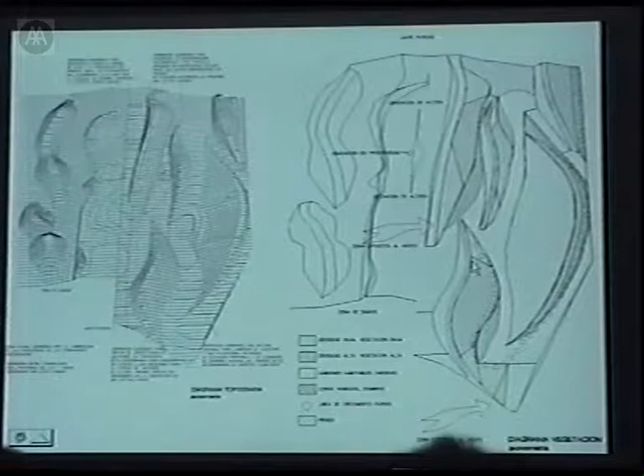At the same time, because the city wanted to have a park with some kind of vegetation, the dunes will form a topography that will protect certain areas of the park from the sea breeze. This is the kind of topography that we envision.

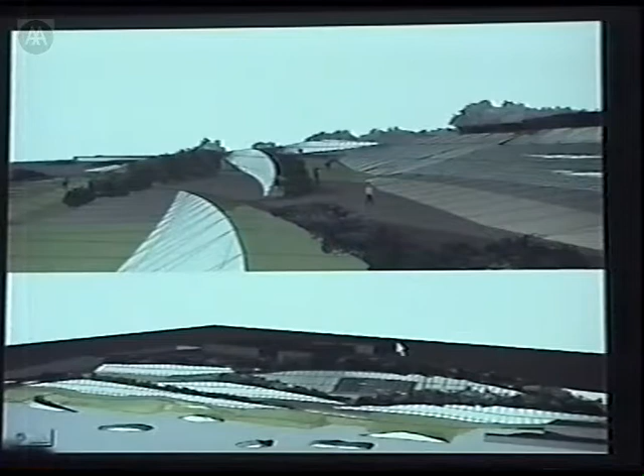There was also another program given by the client at the beginning, which was that we had to locate certain open-air auditoriums in the park, and that was also used as a criteria to generate the geometry of these dunes that construct the edge of the city.

Now, the client didn't have a very clear program at the onset of the project, and there was an extended phase of discussion about what the program could be. Originally, they told us they wanted a very large auditorium. We soon realized that it didn't fit.

But somehow that idea of a green park started to drift towards a more hard surface that has that topography, has also some plantation, and a hard surface that can be used for performances or public events that cannot be located in the center of the city.

So one of the programs we started investigating to generate the topography was extreme sports. The park will become some kind of surface where the relationship between the physical self and the landscape is tested in different degrees. We did categorizations of these extreme sports topographies and also auditoriums, the programs we were considering.

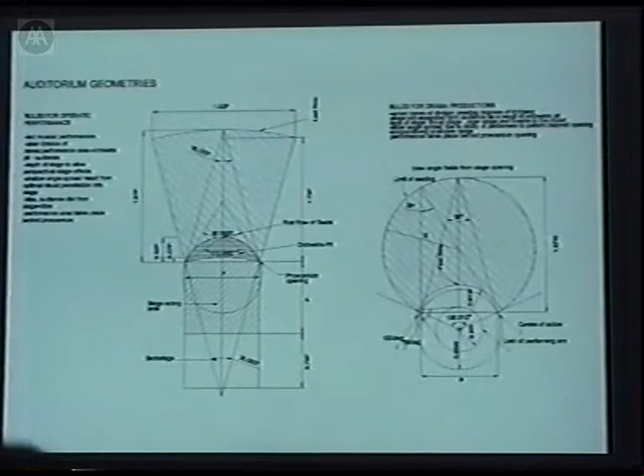We also did a lot of sampling of performance spaces, projection screens, etc., trying to identify the geometry, because the more we evolved the project, the more we realized what was interesting about this park was that it had an ambiguous condition between what we understand as a traditional park, a place where you sit, a topography that isn't particularly specific about its function, and a series of performance spaces.

So when there are performances, these topographies work as auditoriums, as a sequence of auditoriums. When there is no performance, when there are no events, they become a park.

So there was a process in which we consulted different festivals in the city. We started considering the orientation of the auditoriums and the access to them, because some of the auditoriums had quite a large capacity, 10,000 people, 8,000 people.

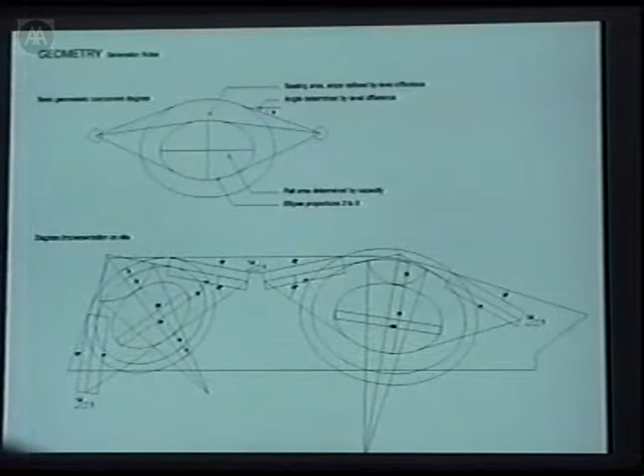Finally, out of all this sampling of open-air performance topographies, we came up with this ellipse that has a proportion allowing us to orient performances in different directions—for example, to throw the sound toward the city when it won't be harmful to the neighbors, but also to be able to reverse the orientation.

We made this prototype of that performance space and the series of ramps that mediate the topographies of the site. We devised this system that, in a way, is a prototype—it could be extended ad infinitum, and it's able to produce different scales of performances, adjusting to the periphery of the site.

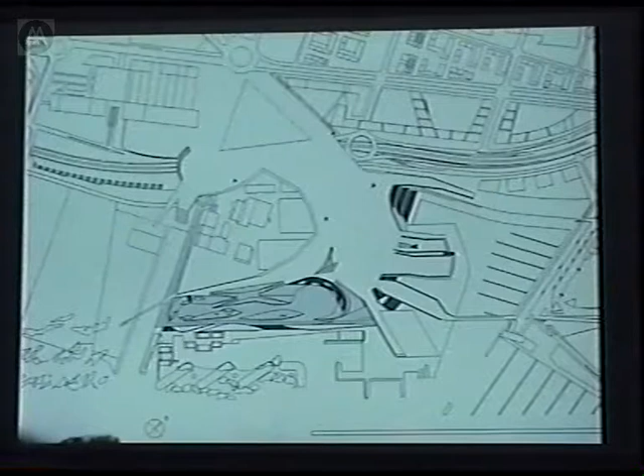That is basically the first topography that is created. You can see roughly what is happening with the other projects. This is an esplanade designed by Elias Torres covering the water purifying plant. We are bordering there, and this one is done by Beth Gali, this by Jacques Herzog, this by José Luis Mateo, and so on. There is a very important series of buildings now being planned and, in some cases, already being built. These are some of the images we made originally to approximate what the park will look like.

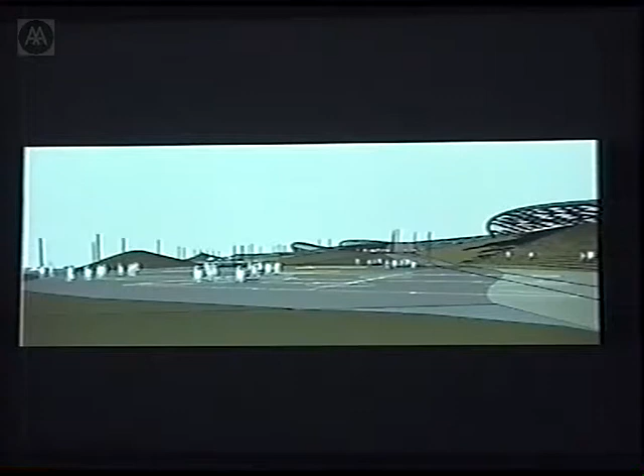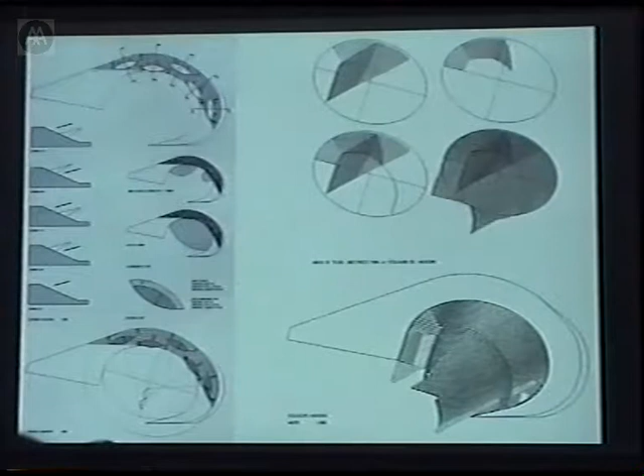Was the problem we identified as the problem that will generate the project on that smaller scale.

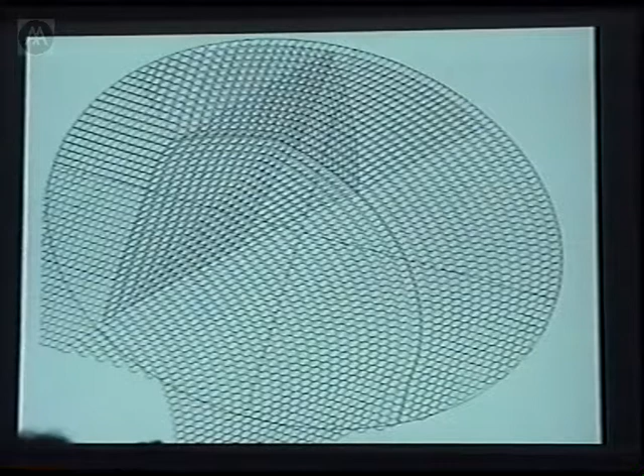Since we had to have hard surfaces and greenery, green ground and hard paving, we started thinking how the tile can also have spaces left for the grass to grow in between, and how the borders of the tiling will automatically generate these differentiating patterns of tiling.

This is what happens when you start sliding a certain type of tile around each other. We did several studies of tiling.

We actually liked this idea of tiling very much working in Barcelona, because, as you know, Barcelona has a great tradition of tilers. Jujol and Gaudí used to work also with irregular tiling in irregular surfaces. The difference here was that we were trying to accommodate the contingency of the topography with a regular tile, with a regular system.

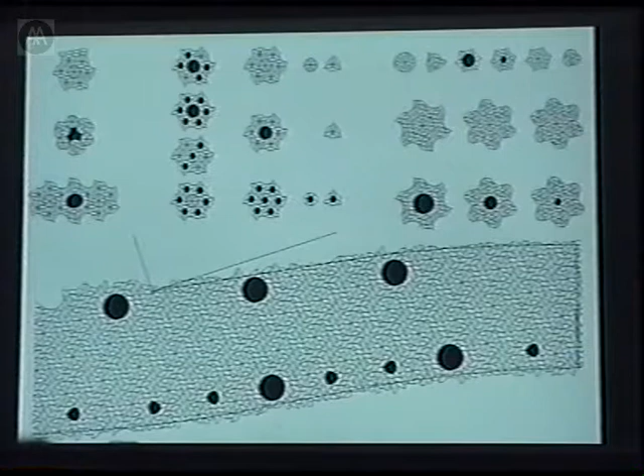These are just more examples, because obviously also the trees had to be planted in the tiled areas, and we were trying different non-directional tiling systems that would allow us also to open the places for the trees.

And finally, we settled for this system that is based on a conveyor belt, like an airport conveyor belt, which is basically a system of tiles that follows a line and adjusts to a certain perimeter and can fill the plane by following this parallel line.

We had to make a program in order to place these tiles, because we had something like 150,000 tiles. Here you see what the program does, which is to adjust the tiling pattern to the conditions of two borders, and then proliferate the tiling almost as a knit through the whole surface of the park.

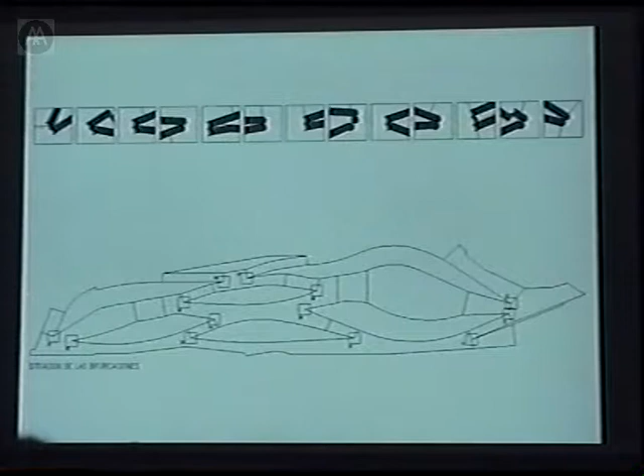We liked also the fact that the tiling system was linear, was consistent with this linearity along the coastline that the structure of the dunes had, and so it was also bifurcating in certain locations. You can see how this conveyor belt pattern is actually able to do this, and these are some of the details of these bifurcations of the ground.

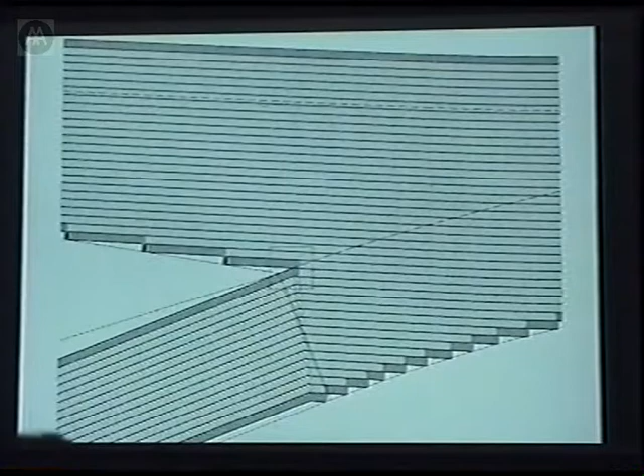It's just about our obsession with tiling. So this is also what happens with the topography of the park.

The park, as I was saying, has dunes and has planted surfaces, and in some areas the dunes are also inhabited. And what we did with the system, the ground retaining systems of the dunes, was to also use another variation, let's say, of the same tiling system.

Which it was something that, if you translate it from the Spanish, sounds like reinforced earth. Which is a system in which the tiles are connected to a bar of steel that goes inside the dune, and as the earth is compacted, it makes the structure self supportive.

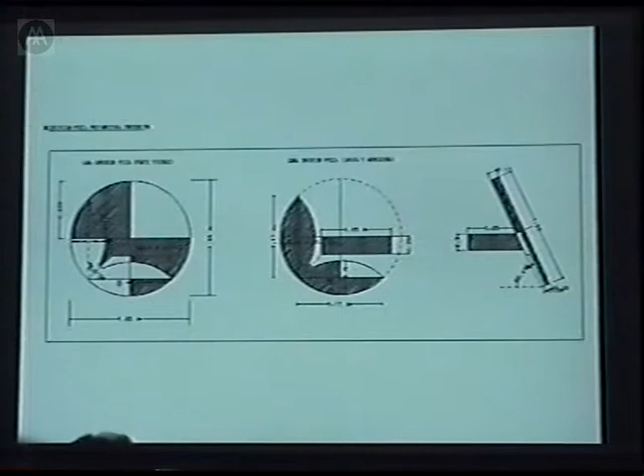So this was the piece of the tile, which is much bigger than the one in the floor, for these retaining walls. And these are some of the effects that this round tile that also adjusts to an irregular geometry produces.

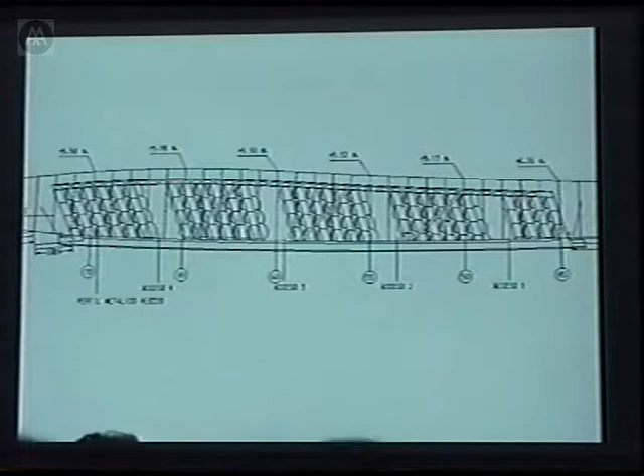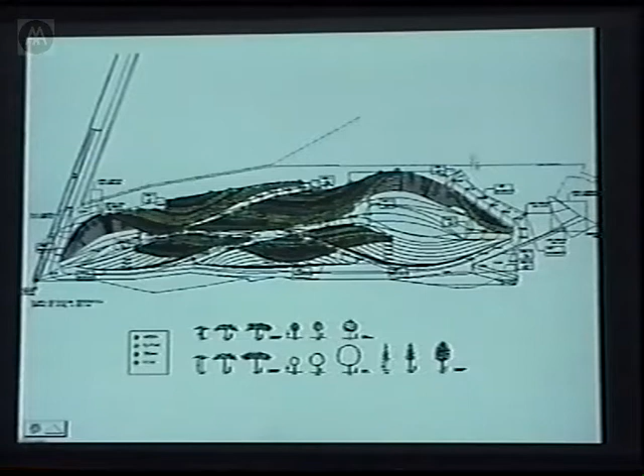And also you can see here the under dunes with some complementary facilities, connection to a car park that is at the back of the park, a kind of disco that is also part of our project, there is some kind of depth around the park.

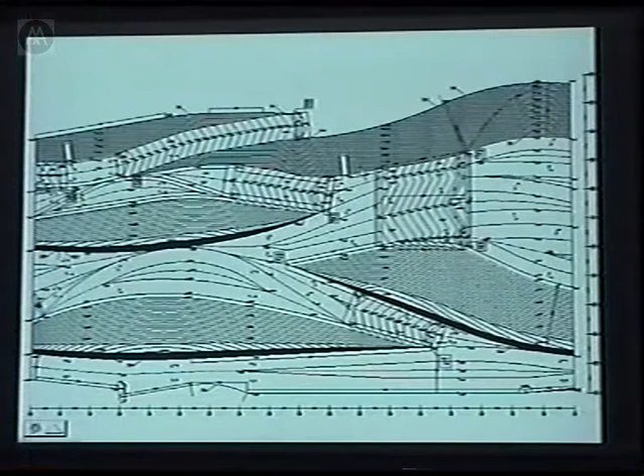This is the final geometry that the setting up of the drainage sectors of the park, that we also make them consistent with this kind of dunar geometry. Sections, I think that maybe it's not so necessary to explain much more.

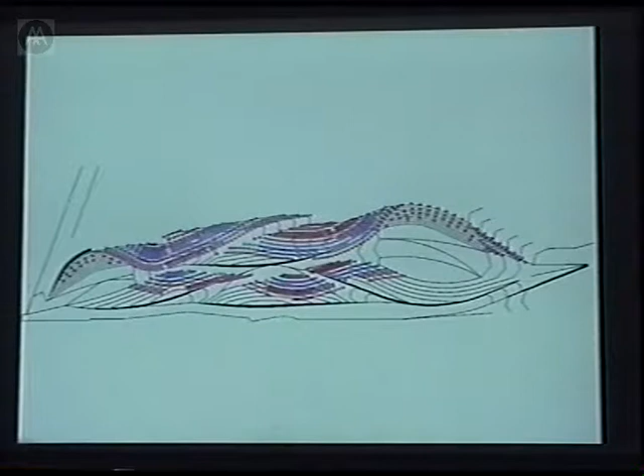This is what I was explaining before about the way of the grid of planting trees inside this hard, what sometimes is hard, sometimes is green surface. But they are planted in such a way that you can go perpendicular to the dunes in order to cut the green with a machine.

So there is also a whole series of knowledge about how the maintenance of the park will take place that generates these grids and the densities of the trees on top of the dunes. And finally, hopefully will look more or less like a park.

Second project is a smaller project, for the police headquarters in a little village in the south of Spain called Villajoyosa, a village of about 25,000 people that is now becoming a hot property of the real estate in the area south of Benidorm, and is improving the public facilities of the town.

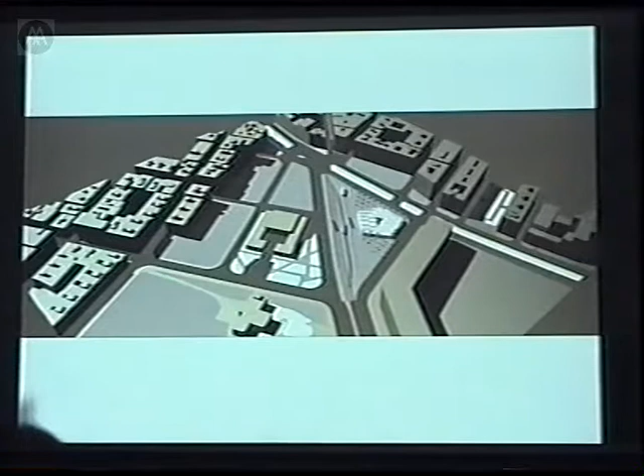The site is that triangular piece you can see here. It's actually not only the municipal headquarters, it's also the reorganization of the railroad platforms that run along the coastline. It's quite an interesting place: here we have the main access into town from the highway, the center of town is somewhere here, and here's the line of the tram that goes between Benidorm and Alicante, stopping in all the coast villages.

Our approach was to try to make a very low building, almost a building that is part of the ground, a closed fence, studying the geometry of the site. We also had this idea that because it's a police building, it had to be kind of secret, so it had to be enclosed, minimizing the ratio between perimeter and area - as close as possible to a round thing.

So what we did was offset the lines of the perimeter, then chopped these two edges to keep the area the building required within that compact form, and we obtained this pentagon. This was critical, because everybody in town thought it was great to have a pentagon.

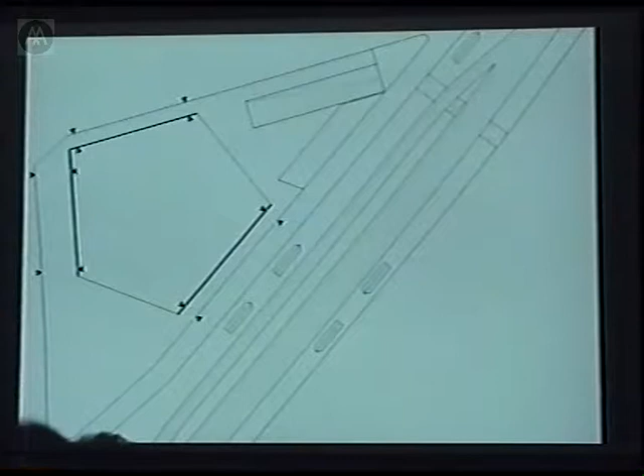It became already a famous building before it was built, and now even more famous after September 11th. This is the Pentagon - we always looked at it as a kind of rock, a thing that is broken. It's not very clear what's happening inside, and this top surface or profile of the edge was...

generated by skylights. The building is secret, it's like a fence, and it's all lit from the top. It's organized in plan - we'll see it probably later - but the idea is that the building has this system of skylights that brings light into the different bays that compose the plan and construct the perimeter of the profile of the mass.

We structured the Pentagon in these three bays, or directions of bays, around a central courtyard, because below there is actually a prison that is lit by this courtyard. There is one floor below.

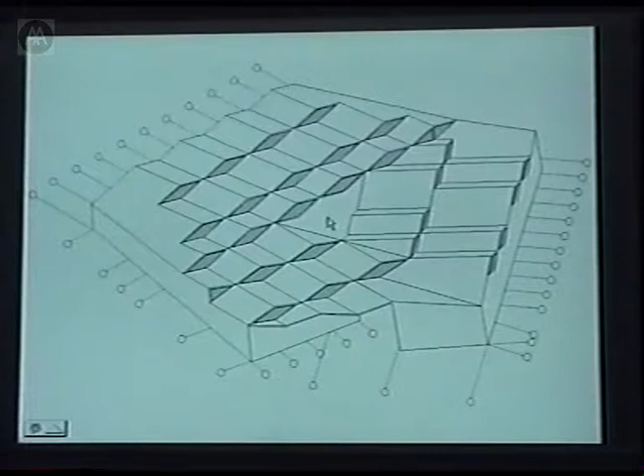What was complicated to do - and we had to do this by trial and error - was basically to start with that profile and keep extending it with a certain slope, negotiating it with the bays that are in a different direction. But sometimes the edges of the roof would go too high or too low, or you'd have head clearance problems. It was actually a very difficult problem.

As you can see, the walls inside are tilted. This is also very funny - I think the police boss couldn't really see it at the beginning, and only recently, when the project was approved, realized that, and was quite surprised. The section is 2 floors.

The top floor is where all the brigades operate, and the bottom floor there is a garage, a kind of small detention center with cells, and there is a shooting gallery for practicing.

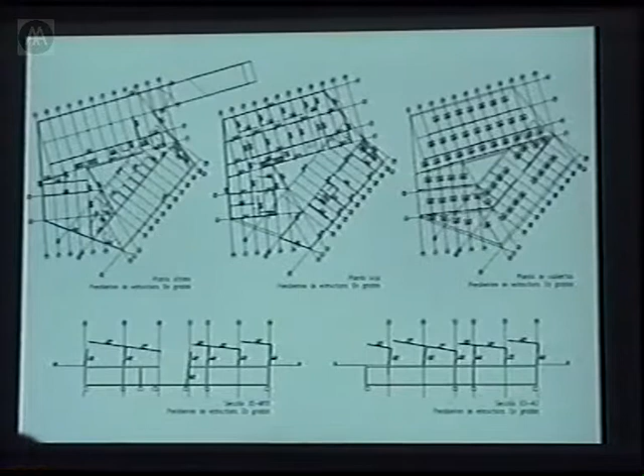So these are the sections of the offices. The grids maybe not, and this is basically how the building will feel from inside. We are doing this building all in raw concrete, but with a tinge, kind of earth tinge. The idea is that it becomes really like a piece of stone, of local stone. The other interesting thing is that normally these kind of skylights are very high, but in this case they are most of the times at 2 meters 10.

So you will have skylights, but at a very low height, which we think will be quite a special thing. I forgot to mention that these canopies are also part of the operation. These are the plans: the shooting gallery on this edge, the small prison with the cells looking onto the courtyard here, and the parking on that side. And this is the upper floor, where there is a bay of public facilities, a bay of administration, and a bay of brigades or offices, and some kind of public courtyard.

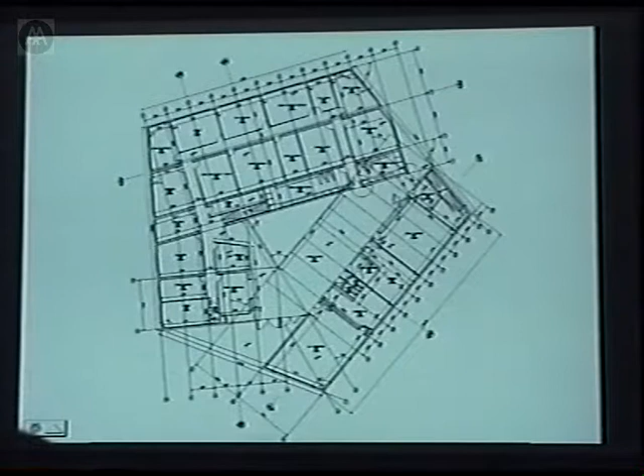The other interesting thing is that obviously we wanted it to be closed, but we thought we couldn't close it completely. So we started thinking, how can we provide windows to the offices on that first floor? And we came up with this pattern of bullet holes that form some kind of lattice in front of the real windows that are normal aluminium windows behind. Actually, they are not aluminium windows; they're steel windows, because they have to be quite tough.

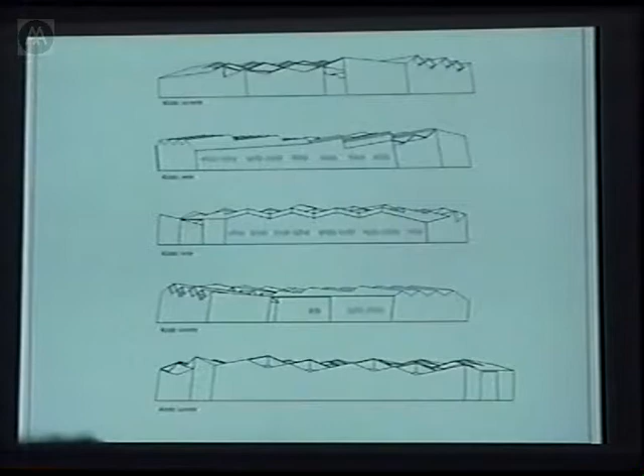And the last project, which is a commission that we won recently as a result of a competition also in the south of Spain, in another touristic village, the place is called Torrevieja. The project is the remodeling, the building of an auditorium theater that will be occupying the place where the traditional theater was, and the remodeling of this plaza that is in front of the theater.

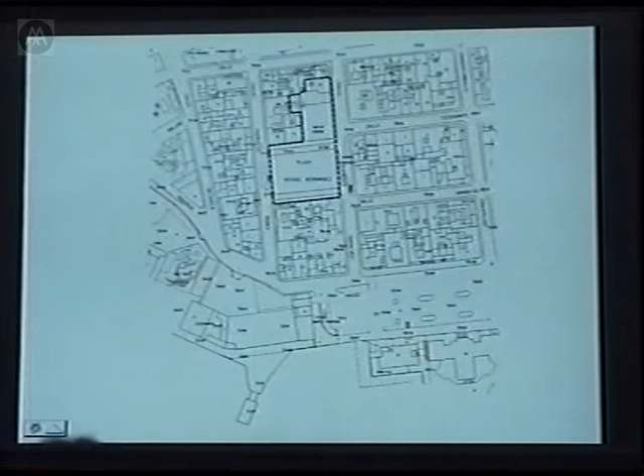So the site for the theater is here. This is the area that can be built as a corner of a block, and then we have to remodel the plaza in front. This is the waterfront, and this is really the center of the town. This is the site after the theater collapsed, and the plaza in front is incredibly ugly.

So basically, the first strategy we had a program that in this case was, as opposed to what happened in Barcelona or in Villajoyosa where the program was quite vague, here we have a very specific program. We had to have 650 seats, VIP room, blah, blah, blah.

So we realized quite soon that the site was actually small for the program we had, and that there was no way of doing things that were too extravagant, because in a way what the building was doing was to close the existing block.

So the first move we made was to say, well, we had a certain idea of how we wanted this theater to be. We want the theater to try to break the division, break the proscenium, make the seating area become eventually part of the stage. So what we did was to simply fit into the site the largest box that we could, where we would put the scene and the seating area together, and use these areas that were left between that box and the firewall as the complementary, the supporting facilities.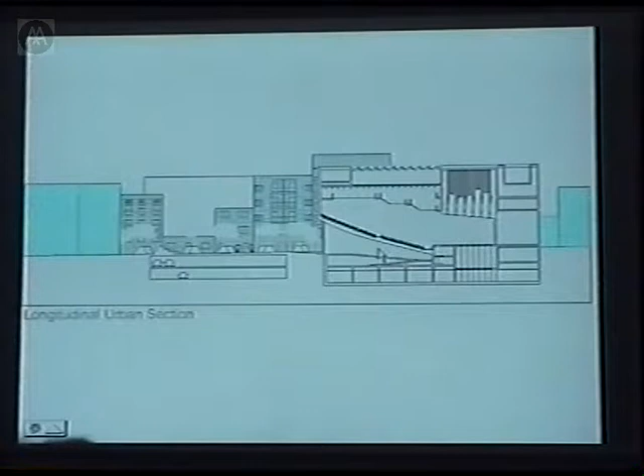So this edge had to be as close as possible to the ground level, but at the same time we needed to put inside of here the foyer. And since part of the project was also the remodeling of the plaza in front, we started to consider maybe the possibility that there is no border between the foyer and the plaza. So there is some kind of continuous space across them, and that the way to give the building a scale of a public building was, rather than making formal gestures, to simply fill out the maximum volume that was allowed by regulation.

So take the edge of the building to the limit and build as high as we can, and simply produce this cut in that mass of the building where the foyer or where the plaza will go into the foyer. So this was basically the idea that we proposed.

We think that what will be more interesting of the project is this big belly that is generated automatically by the geometry of the seats, cantilevering 25 meters in every direction. So we also made it very heavy. We cladded it in stone so that you will almost have the feeling that you are in the plaza and you go under a very, very large and heavy stone that is hovering over the public space.

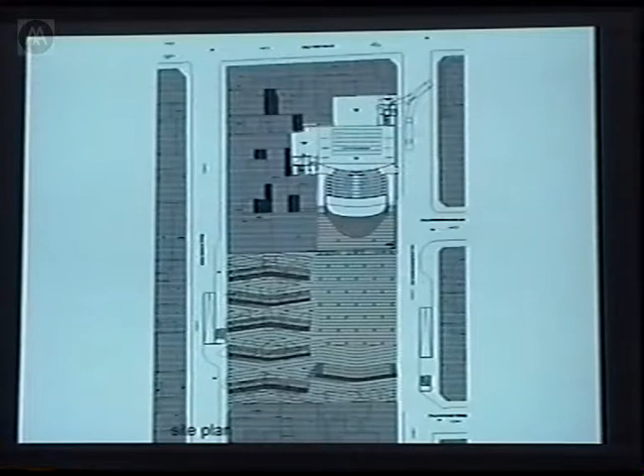This is also a certain treatment of the plaza with trees, etc., but we are not going to get into this. The idea was very simple: to make a theater that doesn't have almost any fat, and it was much more of a typological research than about the synthesis of new topography.

So basically we knew that we were very limited, and all we tried to do is say, well, what will happen if—normally when you look at plans of theaters, or when you go to theaters, you have this stuff around the room. In this case, because of the limitations of space, what we did was take the sitting area to the edge of the theater.

And then we did a lot of research in terms of how to make the ramps, how to make also the public ground—like all these are analysis of ramps in the foyer for handicaps, etc., and the areas that result for cafeterias and foyer.

And we did several of these tests, not only as ramps but also as a kind of auditorium under the auditorium. We quite like the idea that the ground of the plaza sinks down by the effect of the weight of that thing that is floating on top of it.

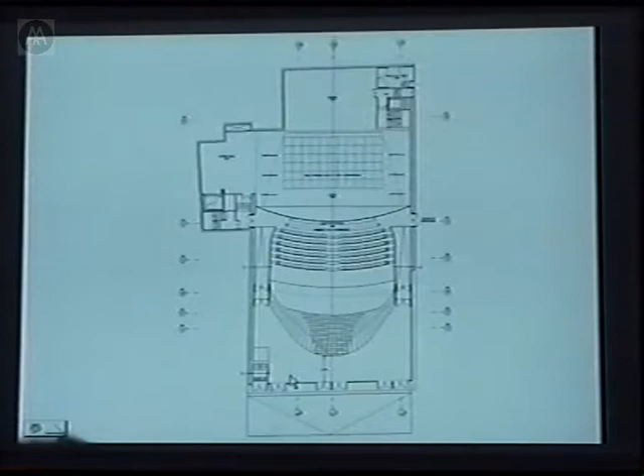So all this area is under the big cantilever. This is basically the effect of the foyer, and the ground level going down under the belly.

And obviously, as part of this typological research, there's the location of corridors, and also there was, because of the limitations of space, a lot of problems to keep the 650 seats and at the same time provide an orchestra of the right scale.

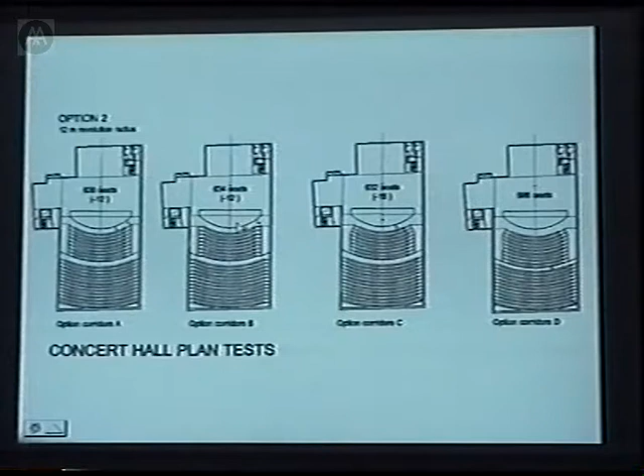So there was a kind of pressure between the orchestra and the seating area that these drawings give account of, until we finally fixed it in this geometry, where also what was interesting is that we had to enlarge the orchestra to touch the edges of the proscenium, which we thought was quite consistent, typologically speaking, with this idea of blurring the limit between stage and seating area.

Anyway, this is what the geometry of the acoustic ceiling will be like.

This town where we are building the project is famous for salt lakes, and these salt lakes have become some kind of the image of the town. So we sold to the mayor the fact that once you are inside the theater, you are like in a salt crystal. Now actually everything is white.

Now, I mean, this is from the competition stage, but we want the seats to be made out of white leather, and the ceiling to be made out of translucent plastic, almost as if when there are lights, everything is white, and then suddenly everything becomes black.

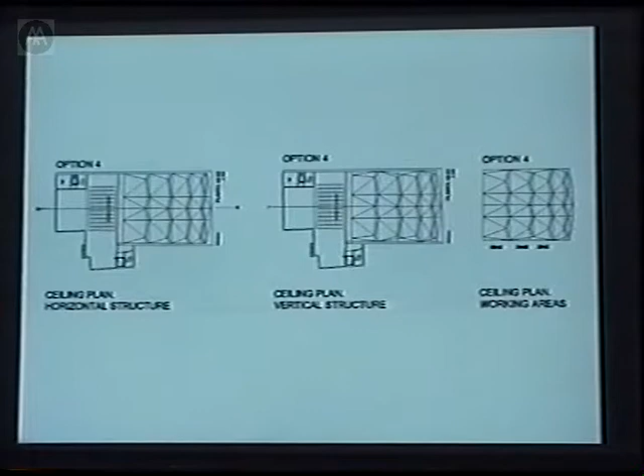So the geometry of this false ceiling has obviously also been a matter of research in which we have had to test different possibilities for the arrangement so that they actually work acoustically. We are working with acoustic consultants, and they do—we reshape the ceiling, and they tell us whether the noise is efficiently distributed in the room or not.

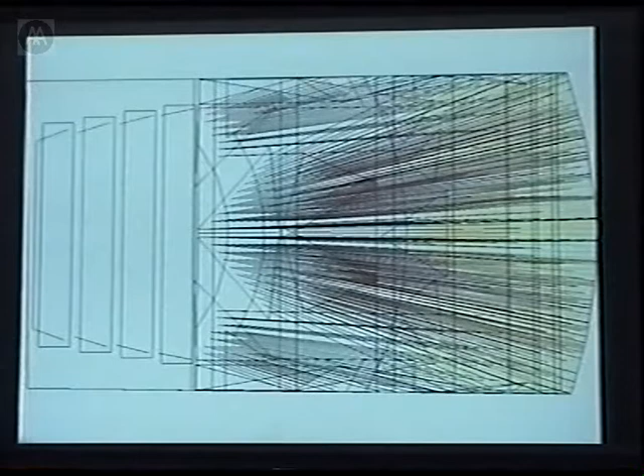So these studies, in a way, are what will finally fix the geometry of that salt crystal. This is the one we have now, and the way that the geometry of that ceiling has been evolving through different tests.

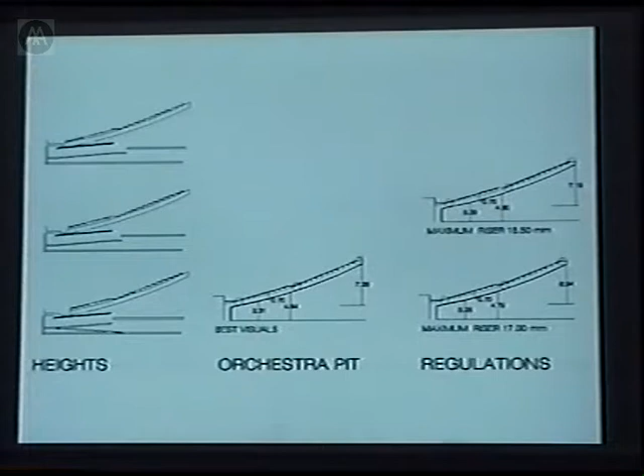The belly. This is simply to explain that the opportunity here was not so much about inventing something completely new, but on the contrary, to be incredibly specific to different parts of a conventional typology and play with them. These are different arrangements of the seating area with curvatures to answer to both fire escapes, and also the air conditioning, which is placed under the seats. It's a kind of plenum where the air comes from. So we had to introduce the structure, the air conditioning, the visual conditions, and we did hundreds of tests of this in order to fix this profile of the edge that will define the belly.

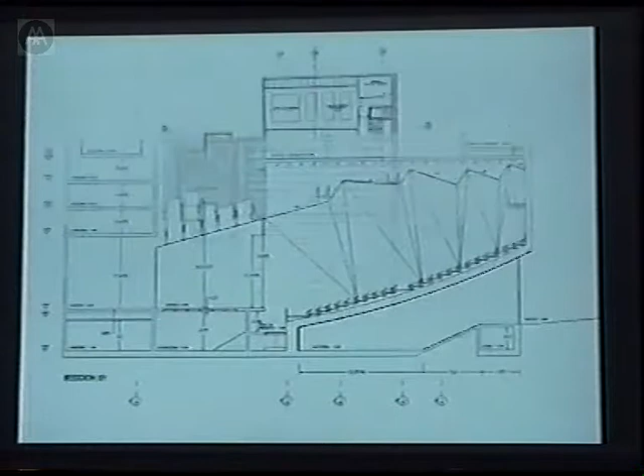And this is the section as it is now. You can see that also we have a function room on top that helps us use the space in order to make the volume of the building this big block of stone. That is this room. And I think now I'm going to let Farshid continue and make some noise.

Now you know that the production drawings are done by the Spanish in the office, given the spelling mistakes.

This is the second time round. Can you hear me? No? I hear myself too much. Okay, this is better. Can you hear me? No? No, I hear myself. Can you hear me now?

Just very quickly, because there is less time and this is a smaller project than Yokohama, we were invited by Toyo Ito as part of a master plan he organized for the city of Groningen, for an architectural festival that the city hosts every 2 or 3 years. This year the title was Blue Moon, and 4 offices were invited, each given 2 sites: one in the inner city, this being our site, and one in an area on the periphery called Europa Park. Our inner city site was to be a house, and our Europa Park project was initially to be a temporary station and a market, and eventually became a performance space and a market.

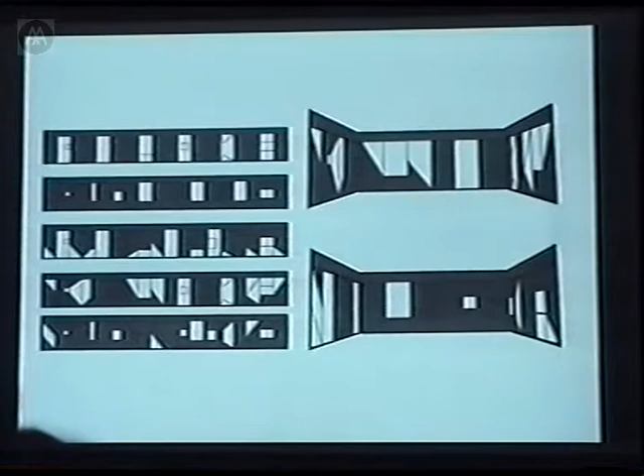It's interesting, talking about these 2 years, that we've been working in a number of countries, each bringing with them a whole different culture. We've found you have to be incredibly efficient in how you operate in each one, because they are very, very different. For example, in Holland the clients are incredibly open — they loved the idea of our sleeping bag and encouraged us to go quite far with it. And yet the construction costs in Japan, at the beginning, were incredibly low. So we...

Did I not say Holland? Sorry, in Holland. That's good.

Costs in Holland are incredibly low, and we had to face this and try to find a way to keep some of these earlier experiments or ideas in the project, yet move on. This is when the fabric became impossible due to costs and also some technical constraints.

We started working with a more metal fabric, a chain link, again working with ideas of mounting it on rails that would allow you to open it up in a less prescribed way than having windows on a facade, so it would actually be an interactive skin. We ended up having to use a ready-made system.

We chose a standard aluminum perforated steel paneling system which cladded the facade. We still kept the idea of a silo, a discreet volume almost closed to the outside, that allowed you to open the skin in a number of ways. These are some ways to open the inside, carrying out some of the earlier fascinations, but obviously not any longer in fabric.

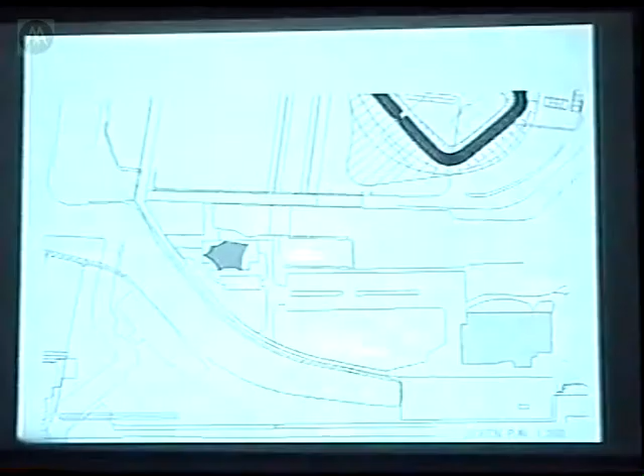The pavilion project became a tent since we chose to work with fabrics. We were given a site to begin with, then moved on top of a concrete plinth that we were told to work with as the foundation. We worked with Adams Kara Taylor on this project.

We proposed that the fabric would be imprinted with a camouflage pattern so that it would be like an artificial forest, with images of how it could be in a market situation. The geometry was defined looking at the various entrances and approaches we had to consider.

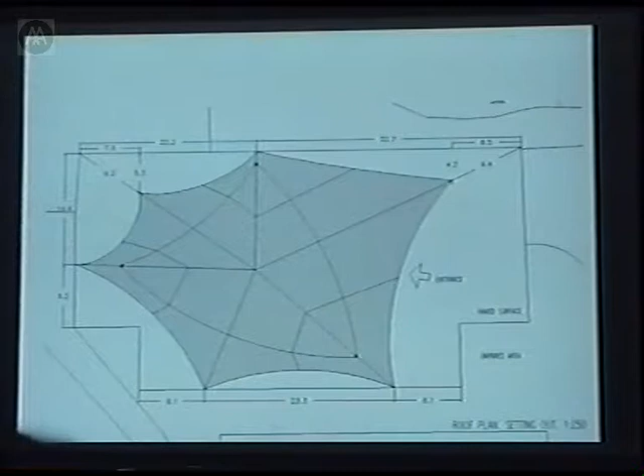We were later told that a round table would be brought in for the events and performance, and the position of the columns, etc., were all dictated by this table. This is the final geometry of the tent, with some other drawings of the final form.

We tried to lighten the columns by working with tensile options that, due to budget and time, were not possible. These are some images of the tent.

Again, the camouflage scale - I'm not making an excuse, just explaining that it is very different to what I'll show you later in Japan - the time was so short that this process of integration of information we are so obsessed with becomes incredibly short and narrow, and you have to learn to be efficient in other ways.

Some of the other images of the tent.

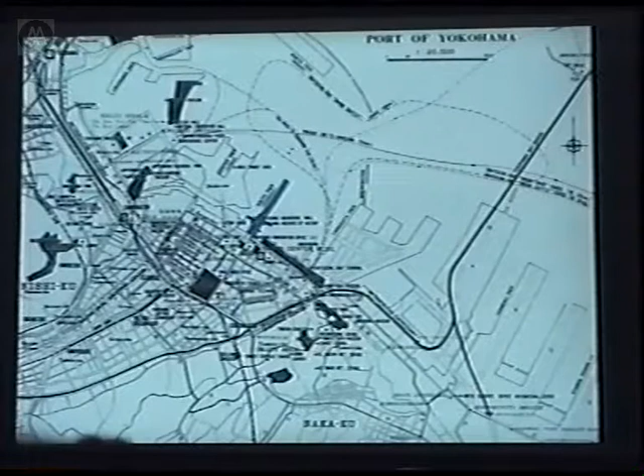Now, Yokohama - for those who don't know the site, it is on the Osanbashi Pier, the blue area. We were told that the project has to become a ferry terminal mixed with some civic uses. Here you see it right behind this ship.

Our addition to the project was that, looking at the context, there was an incredible opportunity for the scheme to become a public space as well as containing the program the client was requesting. There was an obvious gap in the context, in a chain of public spaces facing the waterfront, some currently being developed, such that if the Osanbashi Pier was also declared a public space, the city would be able to host a continuous set of open spaces, with the pier having the largest intrusion onto the water.

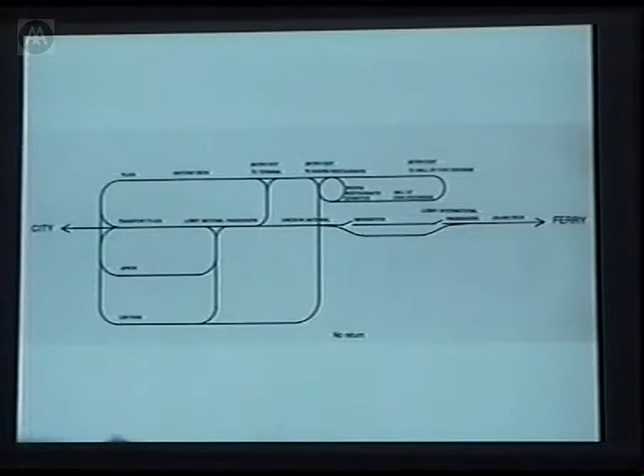The project starts by declaring it a public space, looking at the programmatic circulation and the dynamics of the system. We proposed this no-return diagram that aimed to mix the path of citizens and passengers as a way of further activating the space of the terminal, and to present users with multiple ways to weave in and out of the building, avoiding the conventional cul-de-sac structure typically found in piers.

We then had to give geometric substrate to this programmatic diagram, the no-return diagram. Given that we had said the building would be a public space, we used the urban ground to replace, or to give geometric consistency to this two-dimensional circulation diagram. So the ground would branch to make the connections that the no-return diagram was trying to make across.

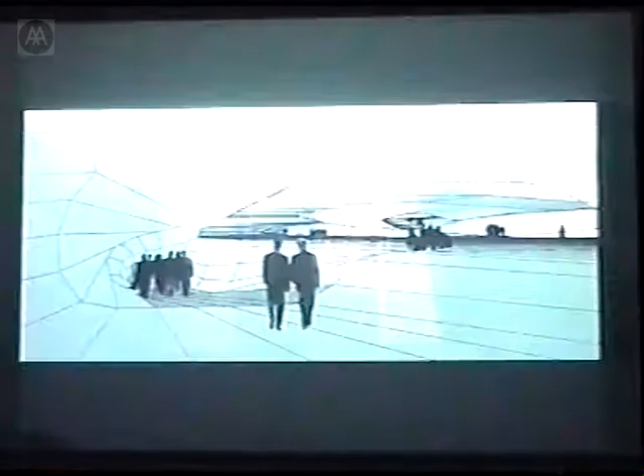These would be the specificities of this ground, from the root to the end of the pier. The form was generated by following the no-return diagram based on program, and making a series of transversal sections to make the connections of the circulation diagram.

The images that we produced were also trying to talk about these continuities between different levels, carrying different people, different functions, the relationship between inside and outside. These are all themes that we try to explore in the project, to diminish segmentation in a number of ways: between circulation routes, between inside and outside, between terminal international and domestic space, and between structure and skin, which I'll come on to.

We then went to give physical content, introducing the material aggregate to the project, looking to be consistent with what we already had, which was a folded organization. We proposed that the structure would be made out of folded steel plates. The entire structure would be made out of folded plates of steel, another scale of folding introduced to the project.

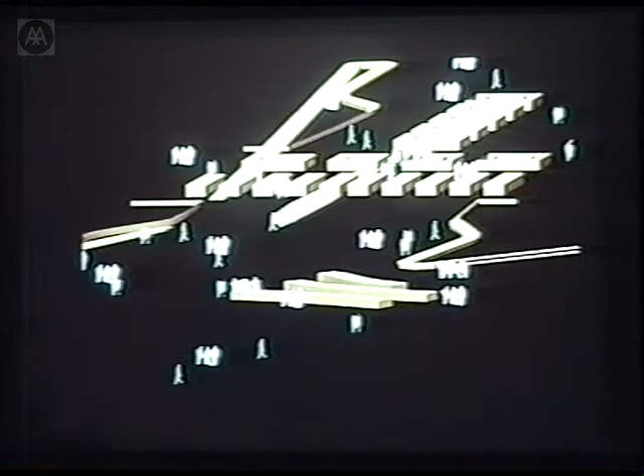Another scale of program, a smaller scale that we had to distribute throughout the space, treated as sediments, as uses that would be sedimented by this drift of people moving through the terminal, always along the side of the circulation, leaving the space in the middle uninterrupted. These are the kind of smaller colored areas that you see.

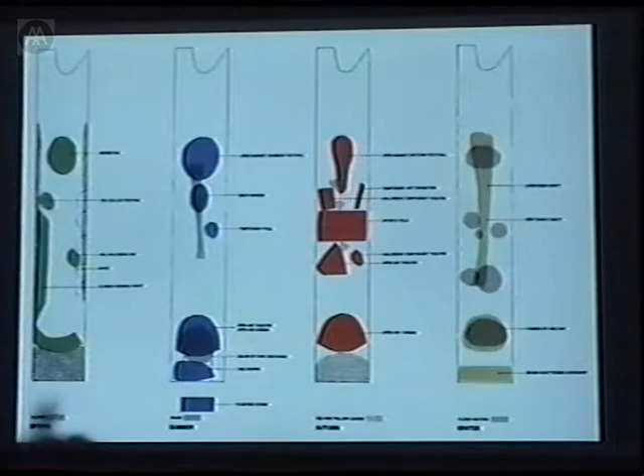This was an image that we ended up with. A last decision at the initial phase was what to do with this rooftop, how to use it, or whether to assign spaces with specific functions. We did a test of seasonal uses, imagining how the specificities of the different regions of the rooftop would encourage a variety of uses over time, but basically leaving it unassigned, simply adding some elements that would environmentally complement the space of the roof.

And these were some of the images. So the space was left almost as a surface that would be colonized by the citizens in a number of ways. Now these are the plans of the terminal level, from year 96 just after the competition, until when we started construction a year ago.

This is just to show that it has been a continuous process of absorption of information coming into the project. Rather than growing new diagrams, the single diagram of the building has been constantly shifting. If you look closely, there are quite radical changes between plans.

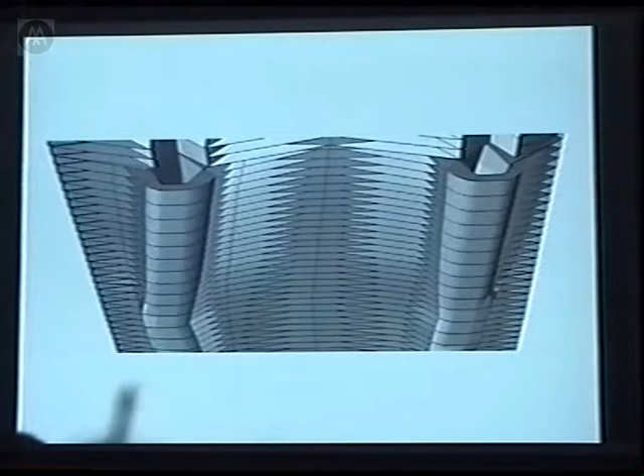One of the first alternatives we tried was to displace the folds of the web every half fold and weave them to produce a surface. This has obviously been tested before by people like Nervi or Piano. In this case it was particularly interesting because the folding would be differentiated at all points along the surface, almost like an organic system.

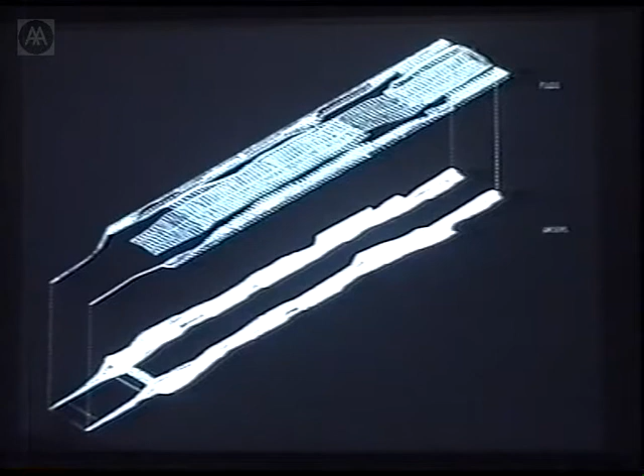Another question of the project was whether to remain faithful to the bidirectional nature of the plan of the terminal that we had, or to remain with this single surface idea that seemed to want to absorb singularities within one congruent space. So which to opt for, because they were clearly in conflict with each other.

We initially did a test of the original, what was named the cardboard structure, and a space frame with local densification, and realized that the axial forces along the length of the building, the large folds in the longitudinal way, were so large that the structure had to become concrete filled, and it was clearly not efficient.

And this was the reason why, despite the images of the building, we decided to go with the bidirectional option, and that's the scheme that has been developed: a series of large folds along the length of the building, bridged by a series of smaller folds in the transversal direction. These are some of the images.

We removed the lower plate of the web and exposed the origami construction. Some of the other contextual material that the project tried to relate to was the tradition of origami in Japan, and we tried to bring this to the project as a material organization rather than mimicking it as an image. Now we had found a way to really turn it into an expressive trait of the project. These are some of the images when the lower plate is removed.

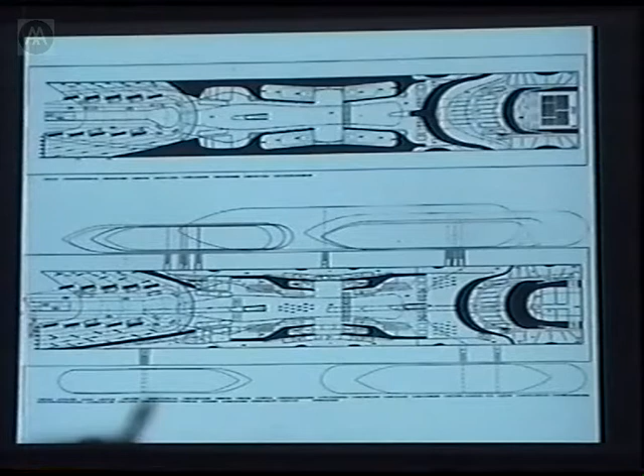However, when we started working, the lower level condition was actually asymmetrical, because the grounding condition given by the project was asymmetrical. We could not land on one side any closer than 21.5 meters, and on the other side 29 meters. So there was an asymmetry on the lower level.

But when we started looking at this bidirectional option, we had to start correlating the lower level girders and the upper levels to coincide the girders and the ramps of the two levels, and obviously the asymmetry started growing through the section of the building.

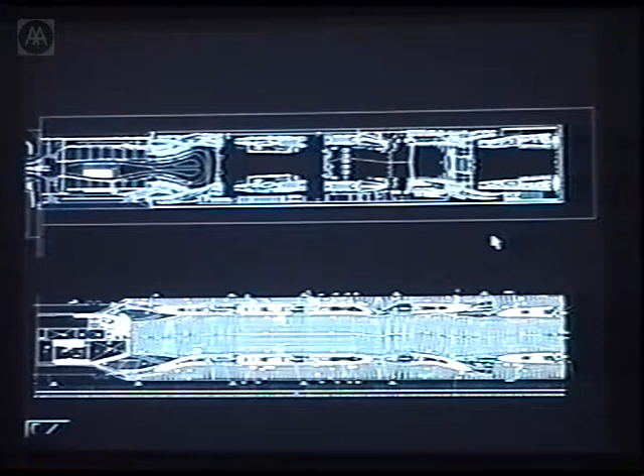And as you see, this is the lower level, and this is the upper level, and the plan of the terminal is no longer symmetrical.

We then faced another obvious problem in the detailed design, which was the increase in the resolution of the grid of the building. We had to produce a lot more information to describe the form. Initially, the transversal sections were made every 15 meters. This was clearly not a sufficient description of the form.

The first attempt we did was to introduce two intermediate sections, and we did this by introducing what is called control lines, which were lines that linked the points of location of specific elements that we had from the brief, and that we were connecting with our circulation diagram. And then by cutting this control line at intermediate planes, we were able to locate other elements along the length of the building.

We found at this point that this was the first moment when we were moving away from another conflict in the project, a conflict that was perhaps between a parallel band technique that we were unconsciously inheriting and bringing forward from our experiences of certain projects at OMA, from La Villette to the Très Grande Bibliothèque to the Den Haag City Hall, that tried to create maximum sectional flexibility across sections by the parallel band techniques.

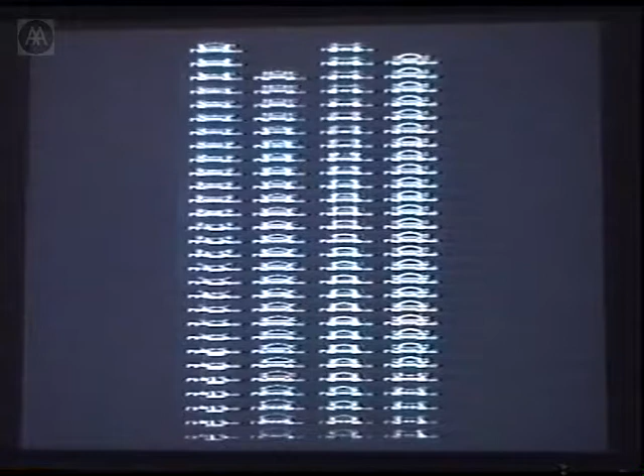And the client didn't understand why we had to draw another 30 sections either way if they were only asking us to change a tiny thing. So we were really exhausted at this point.

This was really the image of the office every day for a year, an office that worked until 3 in the morning on average, 7 days a week. A very small workforce, but an incredible workforce that managed to produce the work. And we had to find basically another way to do this. It wasn't feasible.

This is when we started looking at ways to produce regularity across sections, to make the structure more regular.

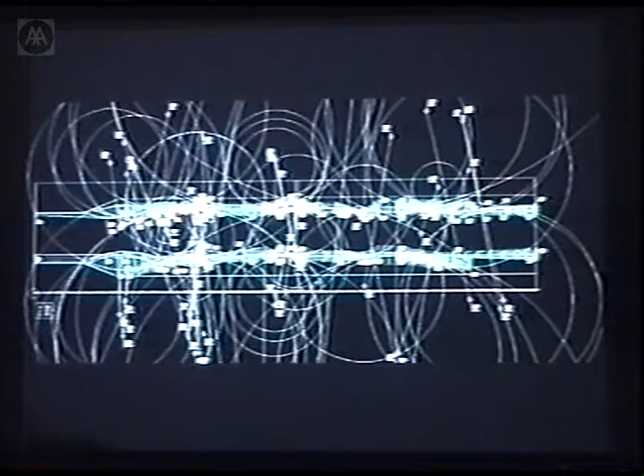We started working with rolling single templates along the control lines that initially were spline curves, and at this point we dropped them for complex curves in order to have more control over their definition, so that these templates would be rolled very much like the construction of roller coasters, where single templates are rolled along a three-dimensionally complex geometry that also has a local referencing system. These were the setting out of the control lines and the rolling along, this kind of sweeping of single templates along them.

Again, drawings of these - since the control lines were three-dimensional, the templates being rolled along them were also not orthogonal but tilted, and the colors relate to batches that would be brought on, batches of construction. These are the inventory of templates of the girders, the longitudinal folds along the length of the building.

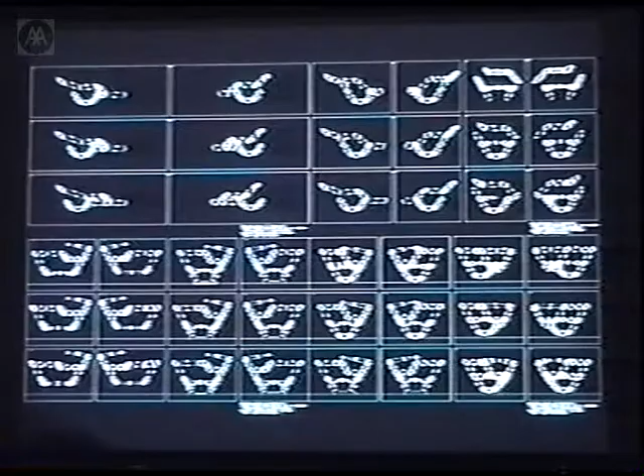At the same time, we looked at how to produce more regularity in the transversal folds, and realized that because we were initially setting out an orthogonal grid of transversal folds against these control lines that were producing the girders, and that were curved, every single one of the folds was being cut by these lines, and every single one of them was going to be different. Obviously this was not efficient.

This is when we started to tilt the transversal folds parallel to the face of the girders, producing local symmetries, and obviously reducing the variation. We did different tests of how the transversal folds could be set out, and the right-hand one, for example, was too expensive.

And finally we found that the only way we could locate the intersection between the stiffeners and the folds, if we were to find these local symmetries, was to write a program that would find through iteration the intersection points.

Eventually we found out that we had to choose between more regularity in the construction of the girders, or regularity in the folds, and given that 60% of the weight of steel was concentrated in the girders, that's what we opted for.

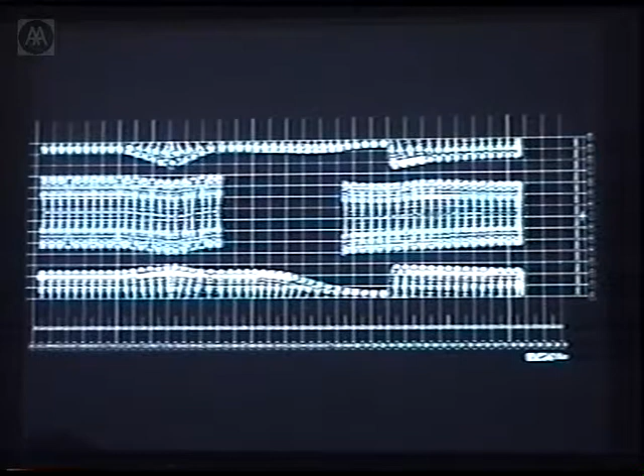And the final version is single templates that are rolled along the girders, and the lateral folds are symmetrical, while the middle ones are anti-metrical.

This is the final geometry of the building, what we now call a move away from the orthogonal grid to a topological grid - a grid that uses local referencing systems to set out the pieces of construction.

Some of the latest plans - you see the reflected ceiling plan on top of them. And the basic shell that we ended up with, this was like the structure alone.

I'll just go through some of the images, and some of the other systems that then started to move, to obviously be brought into the project.

We had to think of systems of fencing, handrails, glazing, flooring, ceiling, and what we tried to do was to do what all buildings don't do, which is to use a very reduced palette and to minimize the number of systems, the number of elements that one adds to the project, as a way of exploring further this theme of continuity that we were exploring in the project through the construction, through the circulation, the way of arranging the program, etc.

So we have one flooring system, which is wood. It's a raised wood system that then gets differentiated along the length of the building. Sometimes this raised floor is deeper on the upper level because it has to also contain a drainage system.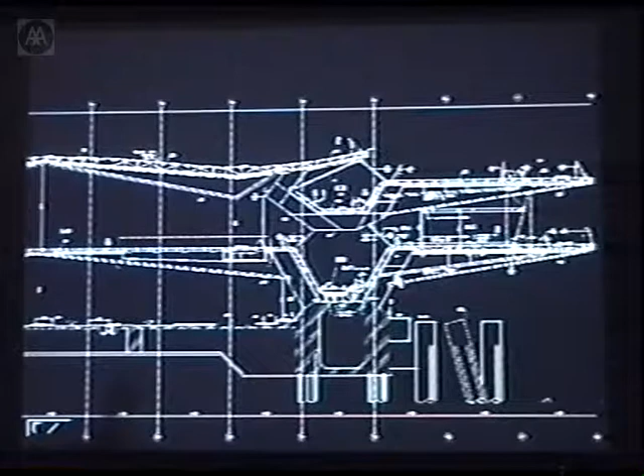Another has been the glazing, which is very interesting. We have two main glazing conditions along the length of the building and in the transversal direction that allow you entrance. I have some drawings that I will show you.

One final system is a system of canopies. Areas such as this, canopies are like surfaces of wood that obviously have a steel structure that appear as legs, and these legs grow longer or are shorter depending on where the canopies are placed, whether they are supposed to shield you purely from sun or whether they have to shield you also from rain, etc. Looking for different conditions that again differentiate the basic system.

This is the wood deck system that I was telling you about, that is just beginning to be placed in. Again, this basic surface also has to sometimes contain fireboxes, emergency lights, etc., and it starts affecting the pattern and the way it is set out.

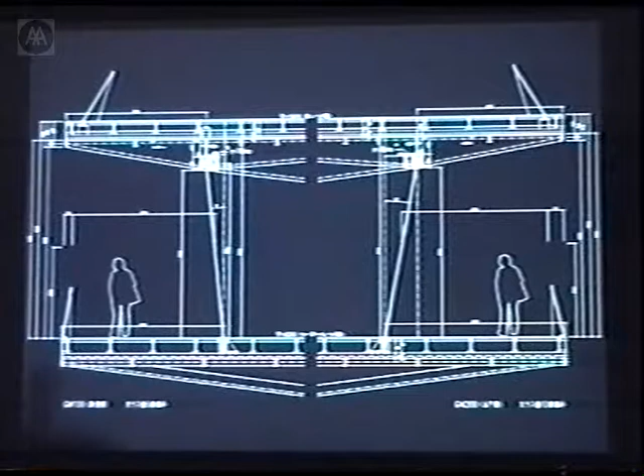The glazing in the length of the building is simply a plane of glass. The only thing is, apart from the fact that it was an incredible effort to have just glass, it was important for us not to have structure in a kind of orthogonal way. But the interesting thing about this system is that the sash is very deep, because these edges of the building are cantilever conditions that have up to 7 centimeters of movement, and the sash is obviously absorbing this possible movement.

The system remains a plain piece of glass until it is 5 meters high, and as it grows higher, you need structure. So we started folding or corrugating the glass to deal with the condition of having support, or to use the glass itself to make it self-structural. So this is when the system starts differentiating. We have glass lobbies that, rather than having glass boxes with structure, we start bending and folding them in order to make them self-supportive.

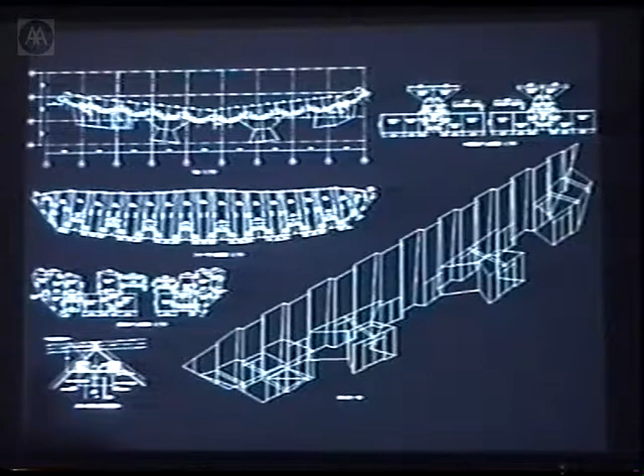So these would be the kind of different glazing images. The basic handrail, as I was saying, is stainless steel pipes that have their tilt change when they are linked to a ramp. They are always connected to the surface that is closest to them. So in the ramps, it's to the more vertical, or the wall areas of the ramp, rather than the floor. Some of the images were produced just before construction.

I'm sorry, I know it's very long, I'll go very quickly. We had two parts to the construction simultaneously: on-site construction that was mainly piling. We went through about 6 months of piling.

This is what the building sits on, which nobody sees. Some of them go up to 50 meters deep and had to be brought in 3 pieces that would then be linked on site. And a very large machinery area at the root of the building that is half sunken, again no longer seen.

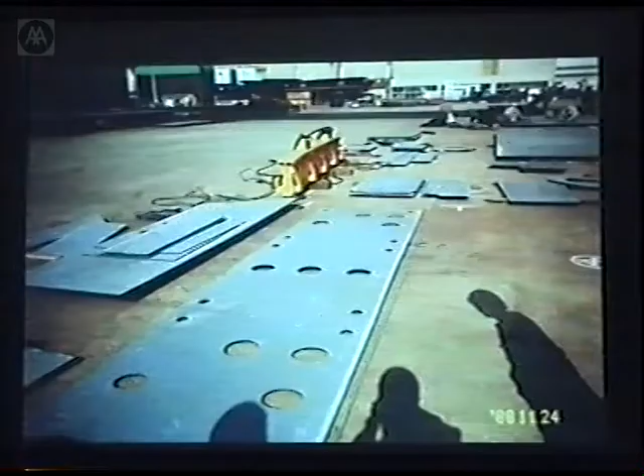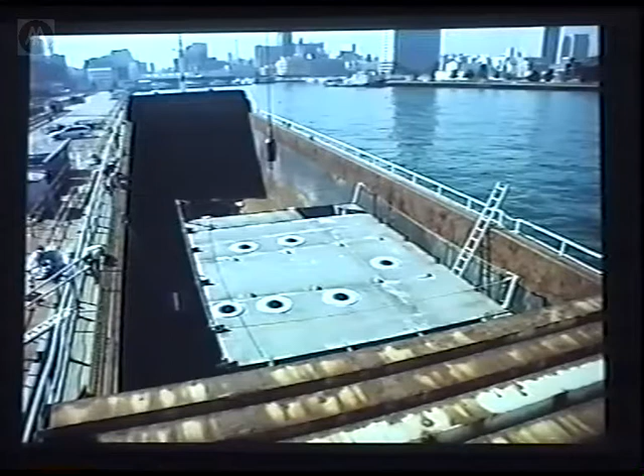And off-site fabrication that, starting from the basic plates of steel, the templates for the stiffeners, the girders, would then be mounted in shipyards in Japan and in Korea, and then brought on site by boats, by ships, to one side, whereas the other side of the building was still operating as a terminal and would be lifted by cranes.

The building has also been divided into 3 construction parts by 3 general contractors. So this was another efficiency that we had to find within ourselves: how to make 3 contractors do the same thing, where they have total freedom once they are given the contract, in a project that is all about continuity and about somehow the same details. This has been in itself something one can talk about.

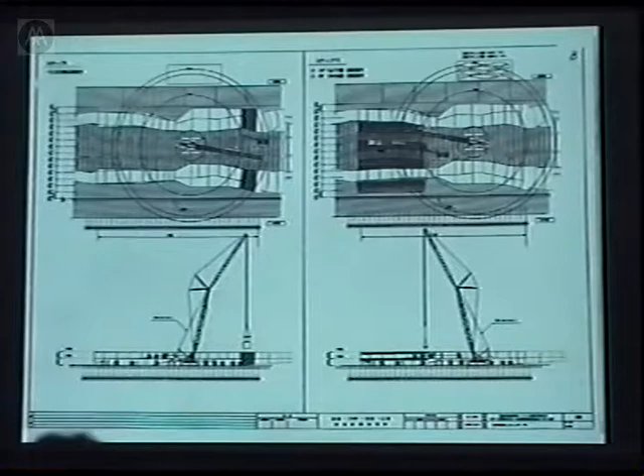Some drawings of cranes that lift the pieces and place them on site. On the right is the transversal folds that follow after the placement of the girders are made. Some drawings of on-site work inside the girders, you see the kind of little men.

If we go just quickly, going back to this local referencing system, every piece relates directly to the next piece, and they get anchored onto the foundation. We have tie beams going from one end of the building to the other, tying the piles, but also securing the building down, and then concrete gets filled around them.

And we just continue. All the services are coordinated. As you see, these holes, all of them come with the right holes. And the second level then gets mounted.

No, well, we've had some problems.

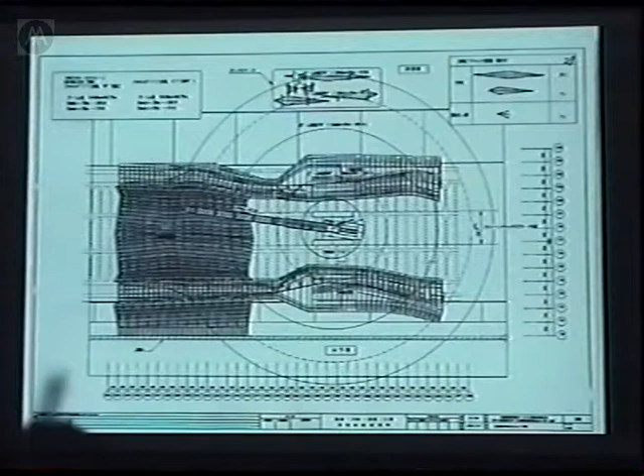As you see, all the kinds of variations of the girder sections. The transversal folds come on boats here. These are the middle ones, and larger pieces on the lateral folds come this way and get mounted on site.

This was maybe a month ago. You see the transversal folds filling in between the girders. The divisions are first, second and third, and construction starts from the middle of the building. They work in either end so that the cranes are disposed, one from the sea and the other from the land. Some of the transversal fold drawings.

Images of them. This is where you see the two levels, the lower level of the transversal folds and the upper. These areas that appear transparent will not, unfortunately, remain transparent. They are mainly for smoke extraction and sometimes ventilation, perforations of the same plate that all the folds are made out of. Because you'll have insulation and concrete layers on top, they will appear dark.

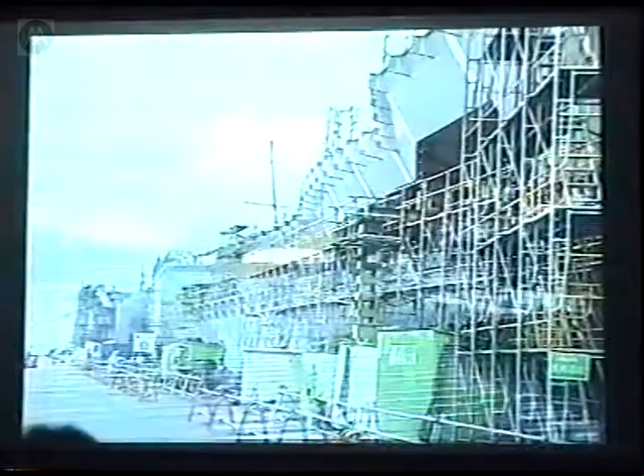Some images of the interior. This is probably one of the most recent states of it. Then the cantilevers, the two side transversal folds become mounted onto these brackets that come pre-prepared.

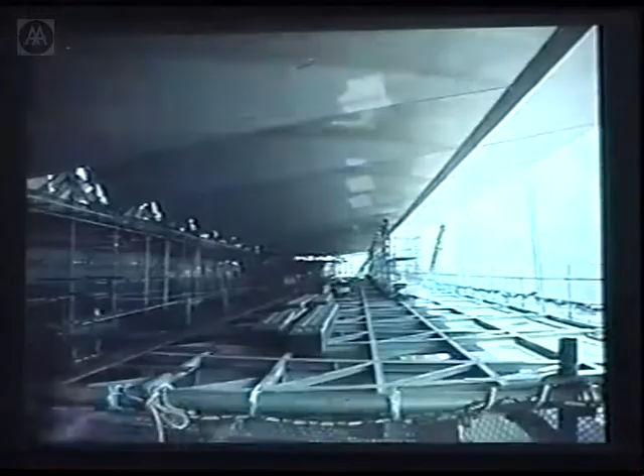We have on one side a cantilever of 25 meters. That is quite impressive when you're there. On this side, 14 meters, but at the end we have 25, and on the Shinko side, 7 meters. These are some of the upper level cantilevers, the level of the terminal.

You see the position of the sash is already there, so the boarding deck would be to this area. Some of the other areas of the cantilever. This is where the large cantilever starts appearing.

I think it will be a very nice moment because you will see pedestrians or people walking up here, taxis and buses dropping off people in front of the terminal, buses and cars going in and out of this location, luggage handling trucks in this area, passengers here and more citizens there. So there is a kind of real simultaneity of events.

Some of the large cantilever, you see this is the 25-meter cantilever that is particularly special because it happens on a headroom that is also very low.

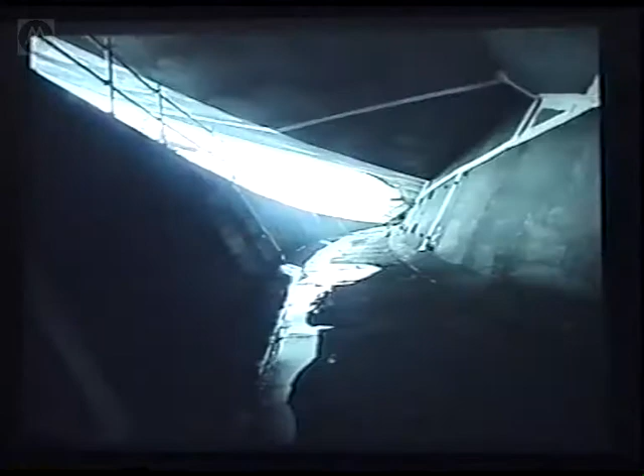Some of the areas where the ramps open up to the rooftop are almost like baroque spaces, surprises we find now, having gone through this way of adding information to the project, almost as if the project is a narrative, a script of a series of independent, almost decisions.

The rooftop again is in some ways broken up because of the changes in topography, and it is very nice when you're there because you can already imagine the different spaces being used in totally different ways.

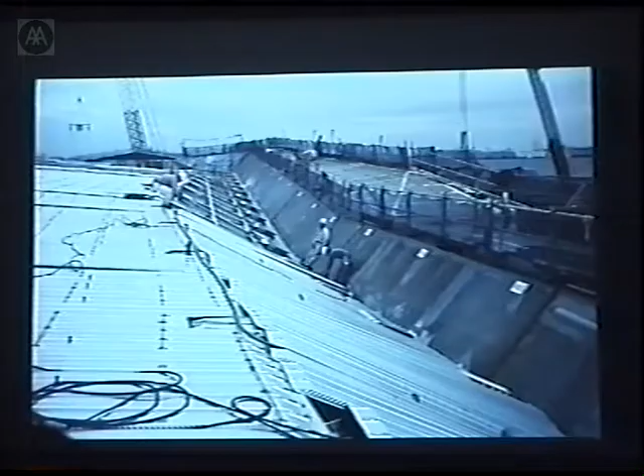This is, for example, an area where there would be an open-air auditorium. You have an entrance right here, and it's designed so that cars can also be driven in, because the civic facilities at the end may at some point host car showrooms or exhibitions. This would be the main entrance to the building.

A kind of approach, but more a real eye view of the entry, and some of the latest status of the project. That's it. Thank you very much.